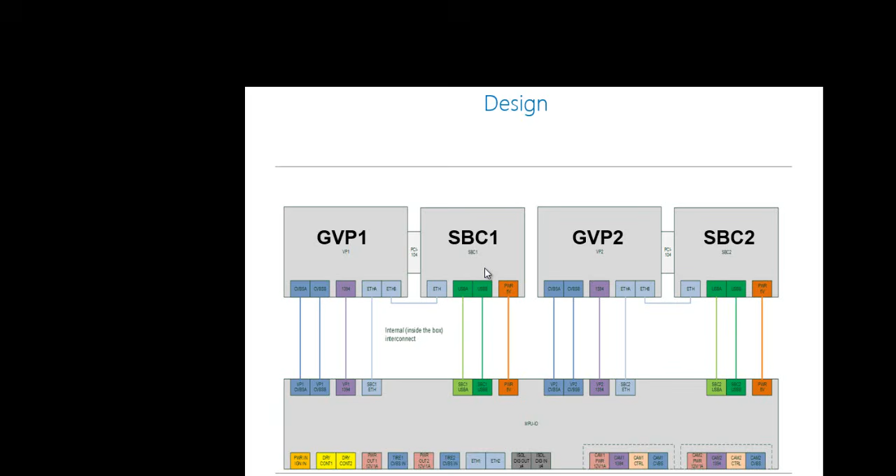When it comes to video processing, we have another component we call GVP, which stands for the Genetec Video Processor. We need 1 GVP per processing unit, so SBC1 will communicate with GVP1, while SBC2 will communicate with its own GVP. To ensure communication, GVPs have their own IP address as well. In this case, GVP1 will get 10.3, while GVP2 will get 10.4. So right there, we're using 4 IP addresses.

Now, of course, what would be a Sharpx with no camera connected to it? If we go for a Sharp X4M, we might be able to connect up to 4 cameras. In this case, we will connect 2 cameras to the first processing unit and video processor, and those 2 cameras will require IP addresses. Then 2 more cameras, camera number 3 and camera number 4, to the other processing unit, which makes it for 8 IP addresses if we allocate 1 IP address per camera.

Now this is a lot of IP addresses, and we want to make this product easy to use and convenient. So we don't expect you, if you wish to change the IP address of a Sharpx, to go on every part of your device and change the address. This would be very time consuming, and this is obviously not the case. So we have the MPU, the mobile processing unit, and the MPU will, among other things, manage IP addressing in your Sharpx.

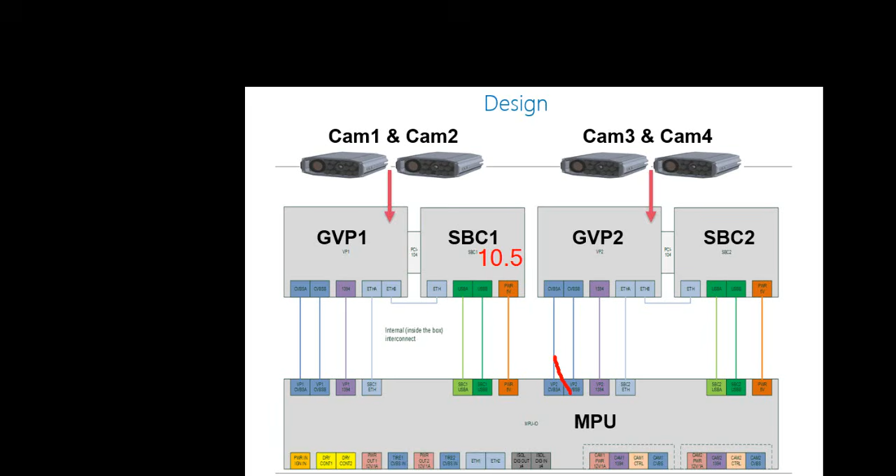So what you do is the following: should you change the IP address of your camera to meet your network scheme, let's say here we're going to go for maybe 10.5, 192.168.10.5. What will happen is the MPU will pick up the new static IP address set for the first processing unit, and will automatically reallocate new IP addresses to the other devices.

Following this very specific order, the MPU will automatically give 10.6 to SBC2, 10.7 to GVP1, 10.8 to GVP2, and so on. So as far as you're concerned, the only thing you need to take care of is change the IP address of your SBC1, and the Sharpx will take care of everything else.

Now this is fairly straightforward. Now the problem we see is you might allocate 10.5 and maybe use your wireless router or any other device you run in your mobile to use maybe 10.7 and 10.8. This is where we have a problem, because you will end up having an IP conflict, and this could lead to some complication during the install. So remember to allocate the IP address of SBC1, and remember that the next 7 IP addresses will be used by the other components of the camera.

Also, the other thing I wanted to say here about this slide is you only need to take care of your SBC1, so don't try to change the IP address on your SBC2. The IP address of your SBC2 will directly result from the IP address you have set for your SBC1.

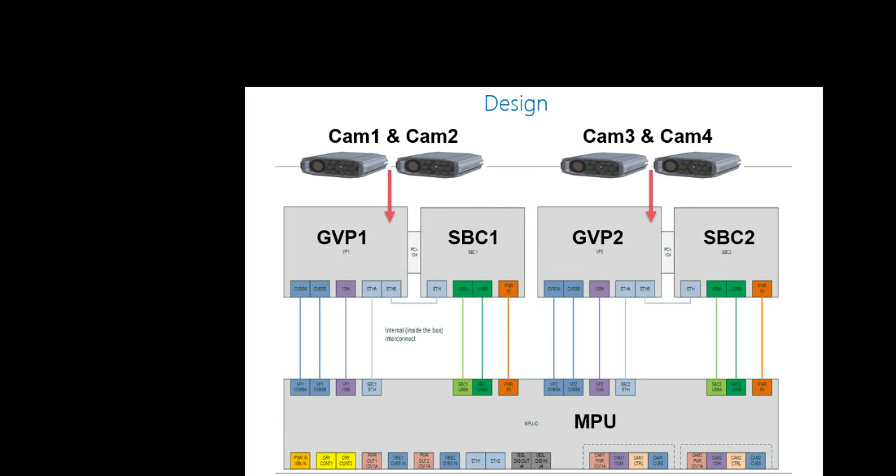Moving on from hardware to software, we often have a lot of questions about how it works inside the box. We wanted to take this opportunity, this webinar, to discuss further what are the software internal components of a Sharp equipment. Being a Sharp 2, being a Sharp EX, or being a Sharpx, the components are the same. We have the Genetec Sharp HAL, which stands for hardware abstraction layer. We have the Genetec Sharp Logger, the plate reader, the Genetec Sharp Portal, and the updater service.

Now, how do those components work? How do they interact? And what do they do? Let's take a minute here and talk about it. The Sharp HAL is pretty much in charge of taking care of your hardware. By hardware, we mean the illumination board, the LPR camera, and the exposure control. So the HAL will be the bridge, or the interface if you will, between the other services and the actual hardware of your camera.

The HAL will talk to the Sharp plate reader, which is really the core of our software. The plate reader is the role that will process the incoming images and find license plates and extract metadata. So this is where the magic happens. This is exactly where we will be able to find plates and populate the information.

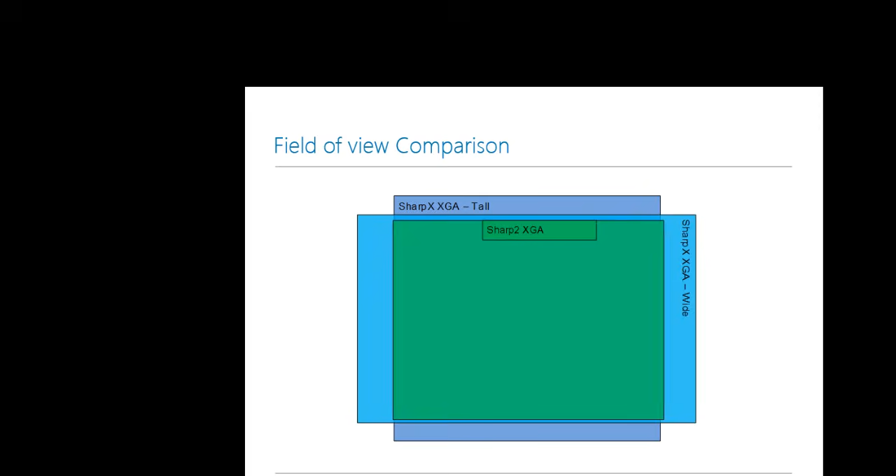Here, for instance, if you get a SharpX XGA in tall, you will get something like this. Now, if you get the wide version, mostly used for mobile, you'll see that the ratio, the format, is not exactly the same. Now, if we talk about Sharp 2 XGA, you'll see that it's slightly smaller. And eventually, of course, if you get a Sharp 2 VGA, the large decrease in pixels will make the field of view a lot smaller. I wanted to stack those here to give you a better picture of the difference between the versions. So now you know what's the difference between tall and wide.

Of course, if you've attended any of the AMC training, you should know by now the lens matters. We offer different lenses which will give you very different results. For instance, let me take an example here. If you attempt to read, let's say, a license plate about 16 feet away from your device, depending on the lens you pick, the result will be very, very different.

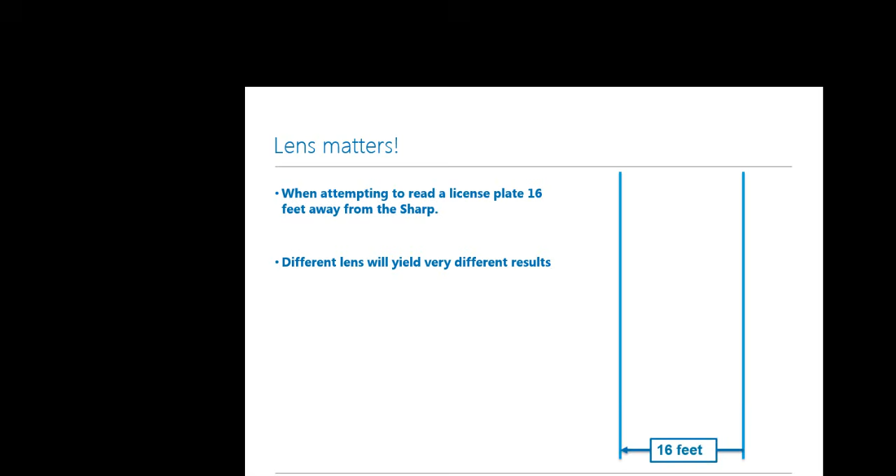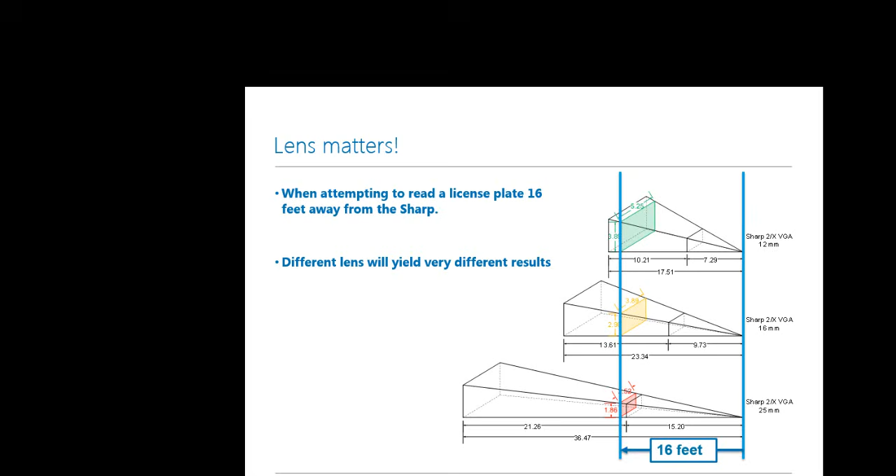Now, if you looked at the AutoVu handbook, we have some information about the different fields of view available. Our product specialist here in AutoVu has been doing a lot of work giving us more information about this. The information I'm about to show you, and much more, will actually be published in a document and available to all of our integrators.

Here I wanted to show you a sample of the work he did, which will give us a much better picture on the practical reading zone for any camera. Let's talk about a 16mm camera, and let's talk about the difference between VGA and XGA.

If we look at the VGA camera, we see a maximum reading distance of 23.34 feet, all in feet. The beginning of your reading zone starts at 9.73 feet. Now you see this chart is color-coded, which is very important for us. The best part is going to be green. Yellow is readable, but not optimum, and red means your license plate won't be picked up.

So according to this document, your reading zone would pretty much end here and start at pretty much 10 feet, giving you something like nearly 14 feet of reading zone. And this is in VGA.

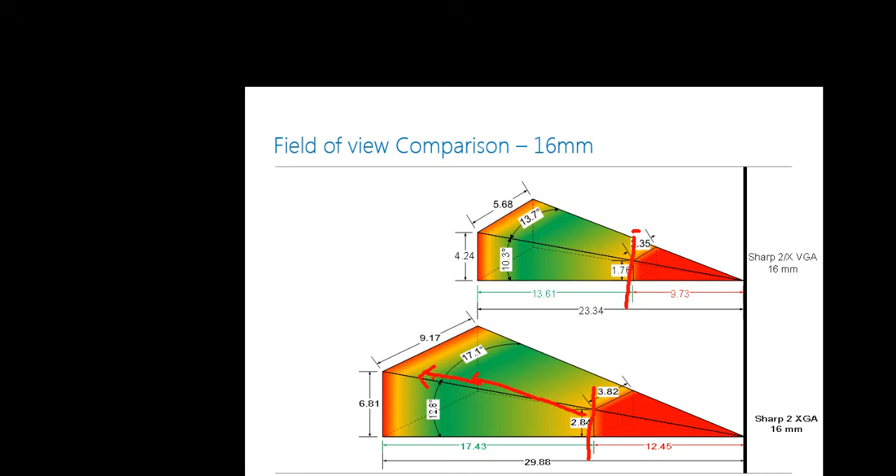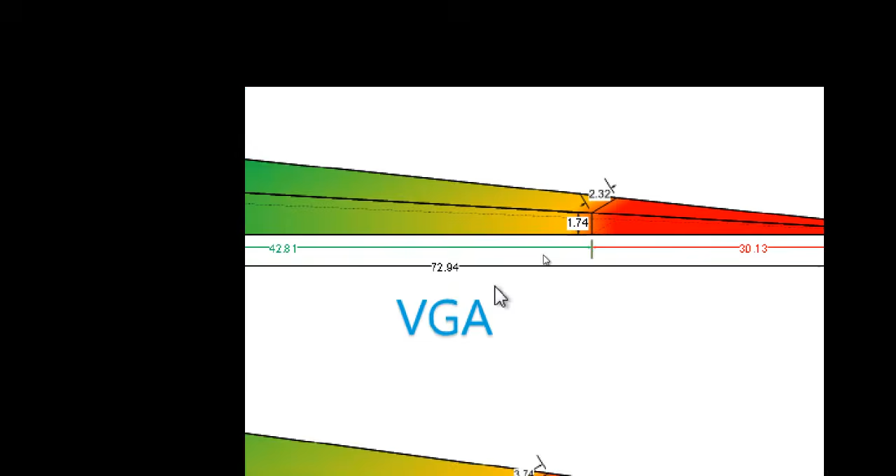I'd like to do the same exercise here with a 50mm lens. Now this has been slightly rescaled to fit in the PowerPoint, so keep this in mind, but the numbers are very accurate. And here we pretty much see the same thing. I'm going to zoom in on the VGA. We see that VGA starts at nearly 30 feet for a maximum distance of 73 feet.

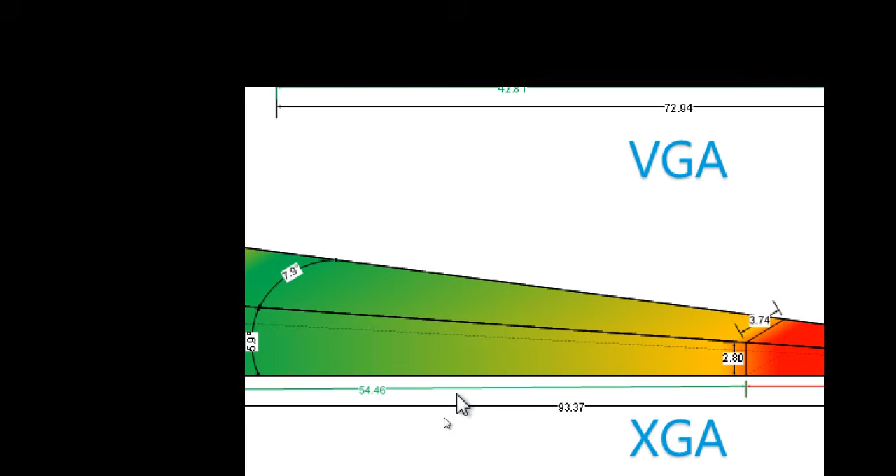While if we go down to the XGA, it only starts at 39 feet, which is nearly 10 more feet, and will end at 93 feet. This is 20 more feet than the VGA version. So in a 50mm scenario, we see that XGA gives us a large advantage in distance. So of course something to take into account when making the decision between VGA and XGA.

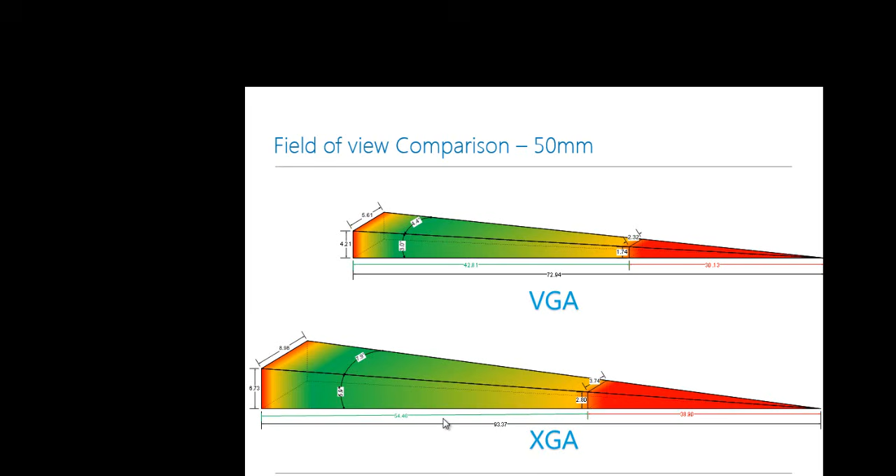Now we're going to stay with VGA, and I wanted to show you this one as well, which is going to give us information on the different lens used, again all in VGA. Now we see that the difference is quite significant. For a 12mm lens, for instance, the maximum is going to be nearly 18 feet. I'm going to zoom in here. Hopefully you can read the number. So we're looking at 18 feet.

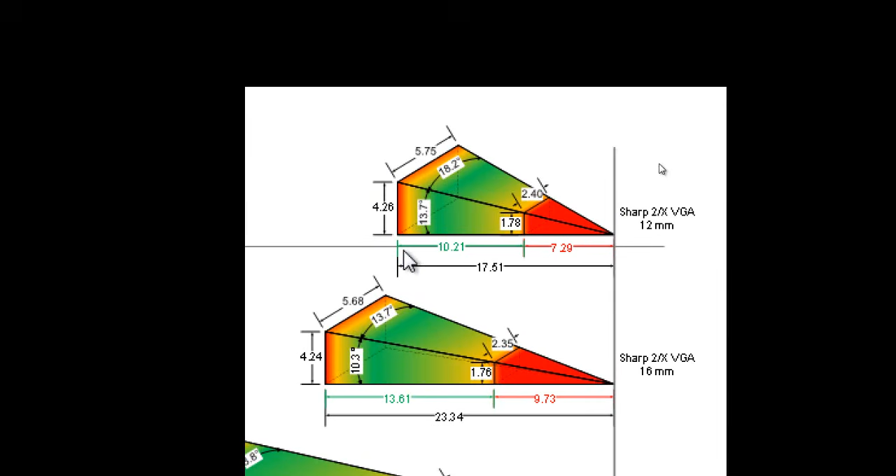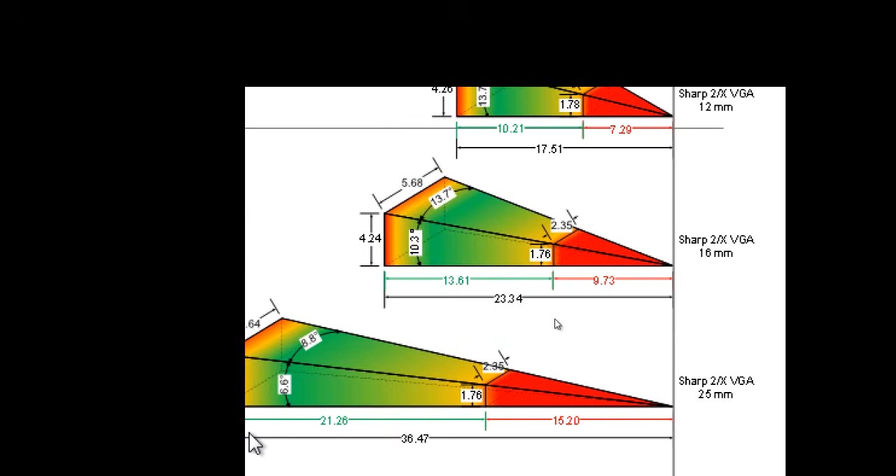16mm will give us pretty much 5 to 6 more feet. 25mm will go up to 37 feet. 35mm will go to nearly 51 feet. And of course, the 50mm lens will go to 73 feet, which is what we've seen on the previous slide.

If we do the same exercise here, this time with XGA, and look at all the different lenses we offer, the distance will obviously be slightly longer. Let me zoom in here one more time. Here we went from 18 feet, if I recall, to nearly 22.5 feet.

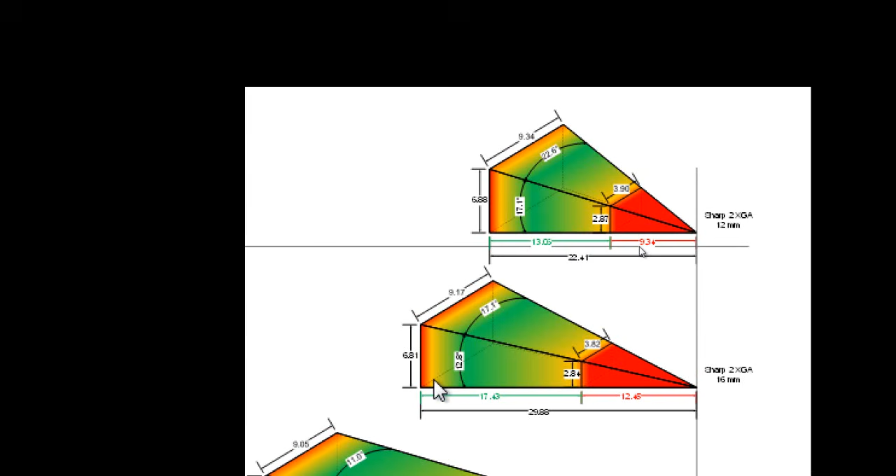16mm will give us up to 30 feet as maximum distance, and an 18 feet reading distance. By the way, when I say reading distance, I refer to the distance between your maximum reading distance and your minimum reading distance.

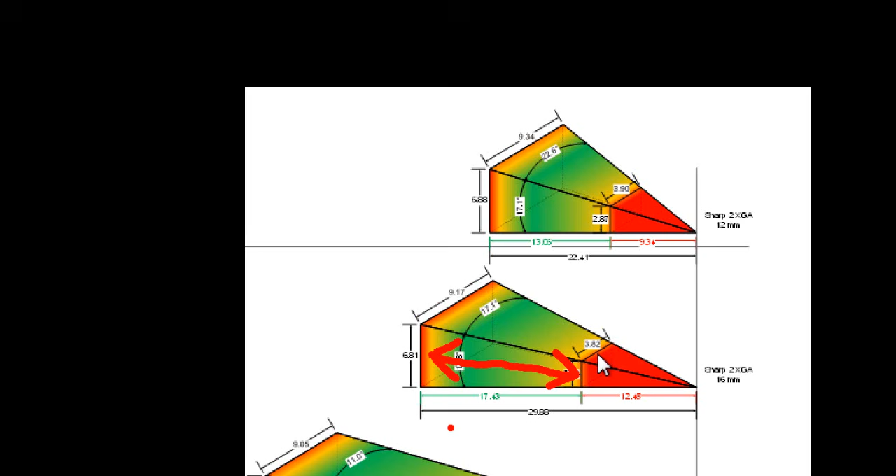In 25mm, we get 28 feet, which is 10 more feet than the 16mm lens. And 35mm here gives us quite a long range, and of course the longest range will always be obtained by a 50mm lens, with a total reading zone of nearly 55 feet.

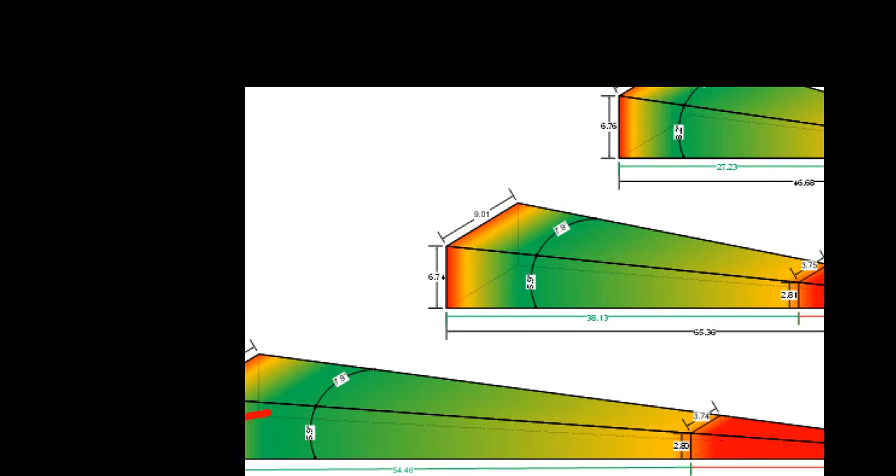Now more than ever, we see it's color-coded and you see the absolute optimum reading zone. It's pretty much here. Now, your system will read, but if you want to stay in your optimum reading zone, this is the one I've highlighted in red.

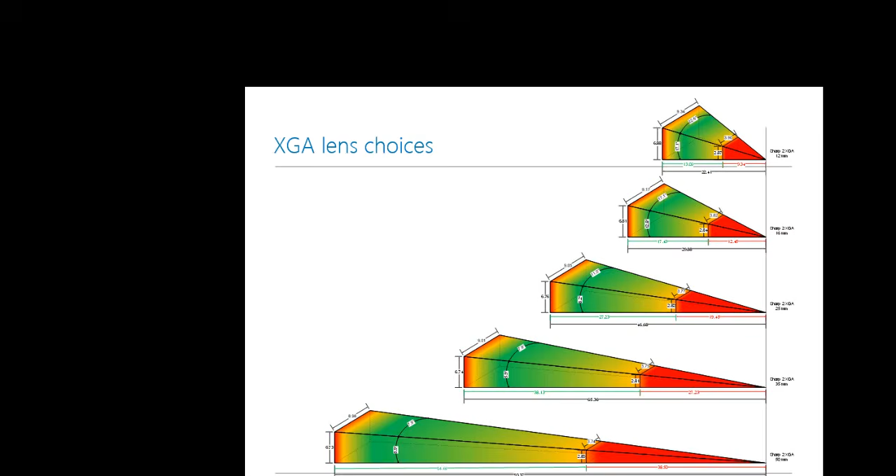Now, let's talk about a few facts here. Reading accuracy is directly dependent on camera positioning. We talk a lot about this in training, but again, I have to insist, it's all about camera positioning. The resulting field of view may vary depending on the hardware, and here I'm talking about the different resolutions available. Lens and LPR camera resolution will also have an impact on the field of view.

As part of the document we're about to produce, including the field of view I've previously shown you, we're going to produce a bunch of tables, such as this one, which is for the Sharp 2 XGA, which has a resolution of 1024 by 768. Depending on the lens being used, we're going to give you the maximum width, the maximum height for your field of view, the minimum reading distance, and the maximum reading distance. You will also have the depth of field, and all of this is in feet.

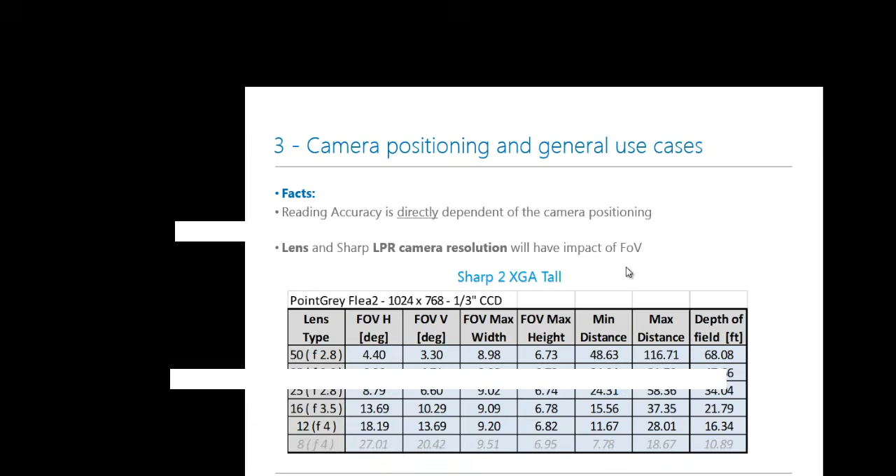There's a tool we talk a lot about, again in training, and I hope you know this tool and you've used it. This tool is the Sharp Field of View Calculator, and it's available to any of you. We strongly advise you to use it to simulate before you actually deploy. This tool will help you find the best position and try different lenses without actually having the hardware. Now there's something very interesting about this tool.

When we use it, we set it in a specific way. Let me zoom in, hopefully it's going to work. If you're not very familiar with this tool, this yellow dot here refers to your camera. This is a top view of your scene, your site. And here we see two dotted lines: one at 7.25 feet, another one placed at 17.5 feet.

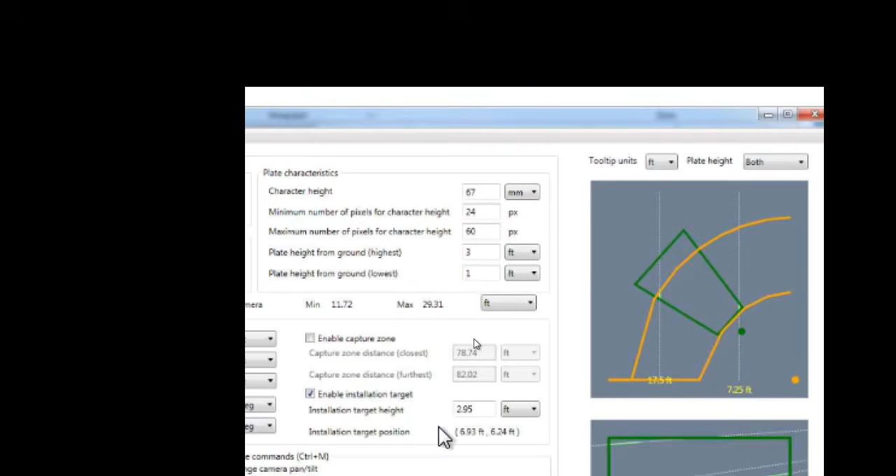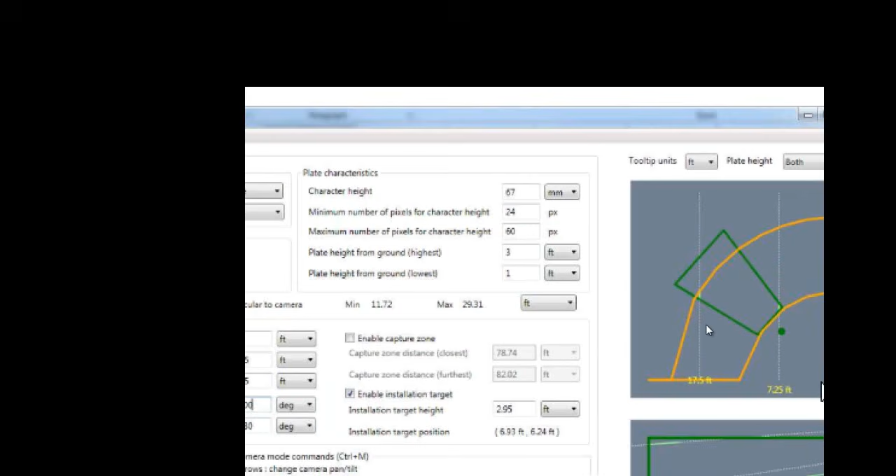Now those two lines refer to the two following arguments here. Maybe it's difficult for you guys to read, so I'm going to tell you. It says lane horizontal distance closest, and the second one says lane horizontal distance furthest. Now, before we argue about the name being used here, they actually refer, as we would expect, to the center of the closest lane from the camera.

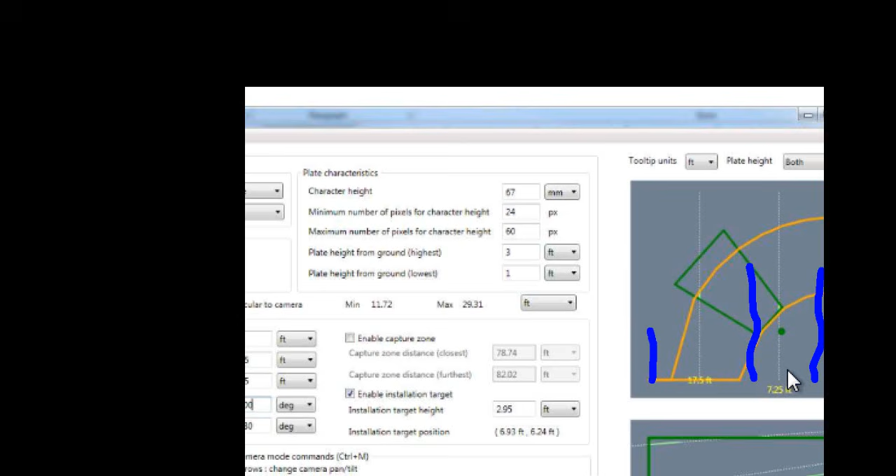So here I'm going to attempt to illustrate. If this is the edge of your first lane, this would be the center of the lane. Now we care about the center of the lane because this is where we expect the license plate to be, should the driver not be drunk. This would be the separation between the two lanes, and this would be the second lane, and again this would be the center of your second lane. Let me say this one more time: what you see here, this dotted line, is what we call lane horizontal distance closest.

Now, this is one way of using the simulator, but there's actually another way, a very different way, which is much more interesting, especially if you wish to simulate a single lane scenario. Instead of using those two lines as the center of your closest lane and the center of your furthest lane, you could use those two lines to set up the edge of a single lane. In this case, what you see here as two dotted lines would not be the center of the lane anymore—it would be the edge of your single lane.

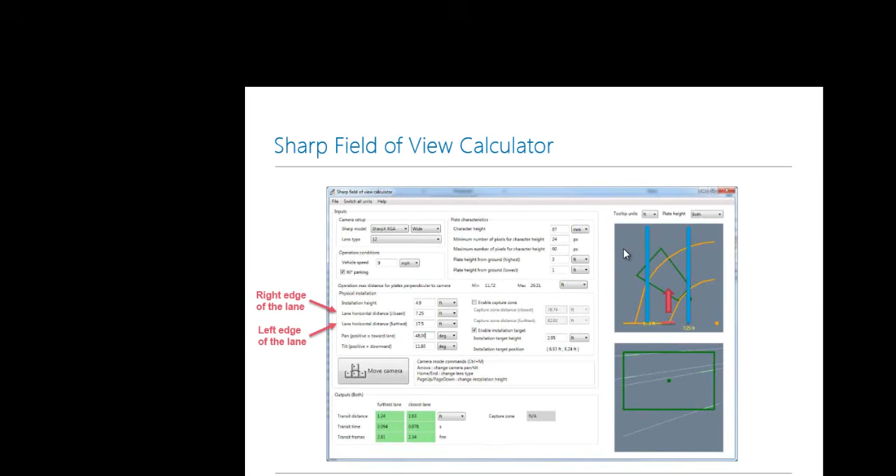There you go, perfect. Now those two blue lines you see here would actually become the two edges, and your vehicle would cross between the two lines. So this would become the right edge of your lane, while the other setting, the furthest setting, would become the left edge of the lane. If this is not clear enough, your vehicle would actually be in between, and it would transit through the lane this way. Now that's a very interesting approach, because it's going to give you very interesting data when you simulate about your different types of license plates.

Let me stay on this slide for one more minute. What you see here in green is the projected field of view of your camera on the ground—well, almost on the ground. This means your license plate will actually transit through the center, again if we expect the person to drive straight.

Now, if the person is not driving very straight, we know that the license plate will always be within those two lines. You're probably wondering, if you simulate this way for a single lane application, this data won't seem so relevant anymore. Well, actually it's very interesting, because this data, giving us the transit distance for the two edges of your lane, will give you the two worst case scenarios—the case where the license plate is on the edge of the lane you're trying to simulate. And if you simulate the two worst case scenarios, and if they match, then you can be pretty much sure that any license plate within those two lines will be perfectly read.

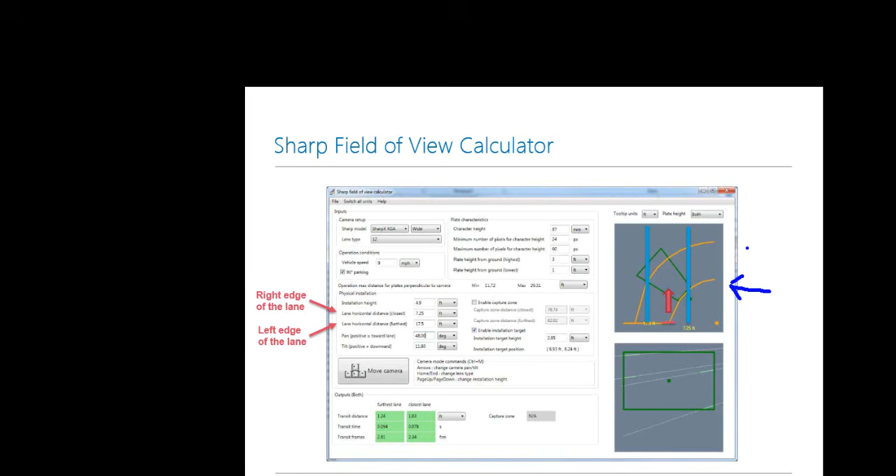Now again, this is the top view here. And the general feedback we got from you guys is that this view is not very clear. Now this view here is what the camera sees. It might be good for us to give you this information, but some people are not sure how to understand it. Why is there 4 lines? Why is part of the line solid green while the other part is dotted white?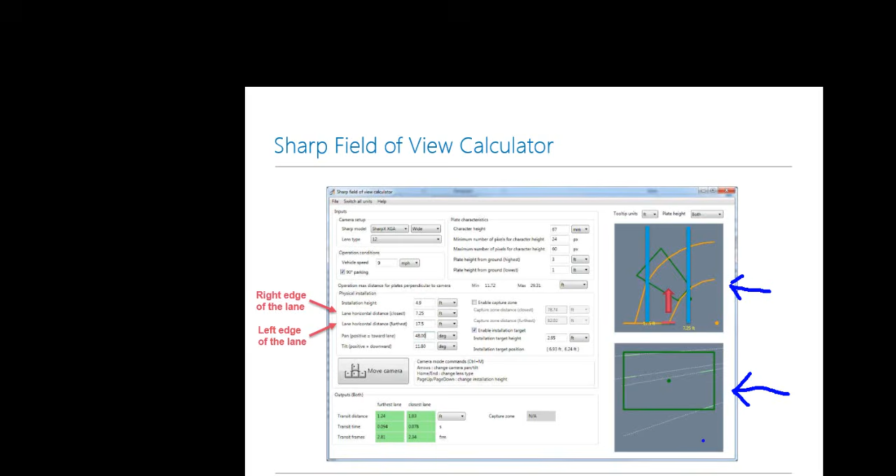Well, this, as a reminder, refers to 2 pieces of information. First, we set up 2 lines, so we're going to have a simulation for the transit distance of plates on the first lane and the second lane. Then why is there 2 times 2 lines? Because we always simulate worst case scenario. We always look at the license plate in a very high position, the one we define as the highest expected license plate. And of course, we always look at those people with a sports car like Lamborghini, where the license plate is at a very low position.

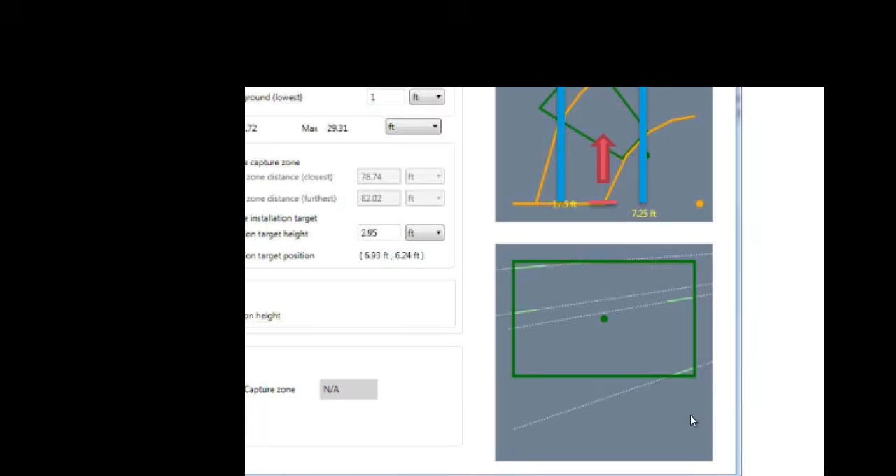So again, here, if I attempt to illustrate this, here would be our sports car, and the other line here would be our vehicle with a very high plate. And those 2 other lines would be the sports car on the other edge, and here it would be the utility or pickup, whatever you have in mind.

Now, staying in this new configuration where those 2 lines refer to the edge, I'm going to attempt to give you a 3D perspective of this simulation. What you see here in blue, this cube, is your reading zone. Every license plate that transits through this cube will be read.

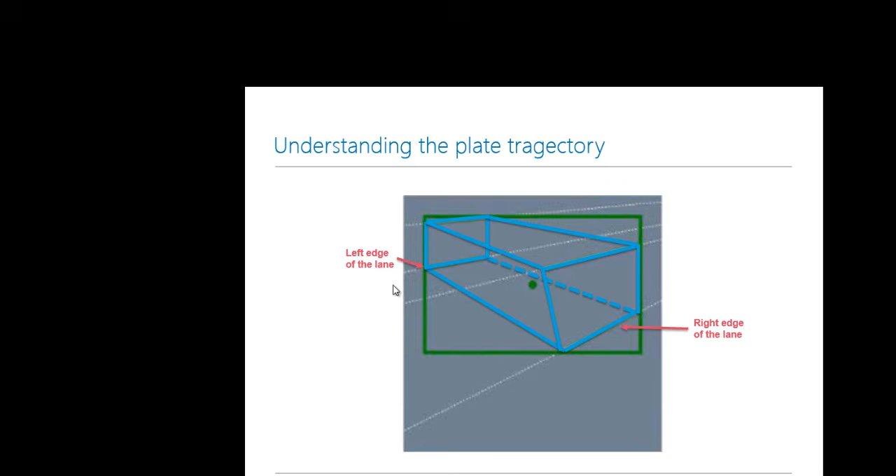This here is the right edge of the lane, while this is going to be the left edge of the lane. Of course, here we have 2 lines because we always look at the lowest plate and the highest plate. So the highest plate on the edge of the lane would pass through here, while the lowest expected license plate from the right edge of the lane would pass through this line. So any normal driver would actually be pretty much in the center of this shape. Here, if we take a license plate that would normally transit, it would do something like this.

Using the field of view simulator to simulate a single lane with these settings gives you a much better perspective and will help you exactly narrow down where your reading block is. This is pretty much what we could call our reading block, where every license plate that transits through it will be read. Again, I'll show you this one more time: your license plate will go inside. Of course, I did not take the entire vehicle to make it easier to read.

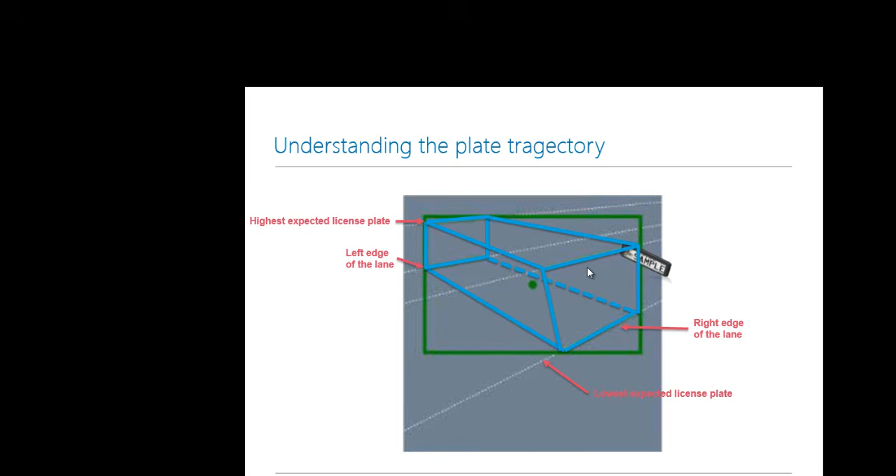Unfortunately, I can't hear you, and I don't know, guys, if this makes sense to you. I hope it does. Yeah, this is it.

Now with this in mind, let's look at some mobile scenarios. The field of view tool allows you to simulate both fixed and mobile scenarios. For mobile, it's a bit more challenging because you need to simulate and use as a reference point the position of your camera, which is likely to be on the roof of your car. This will be challenging because you have to recalculate the different numbers. Let me illustrate this.

When you use the field of view tool to simulate a mobile scenario, you can only do one camera at a time. And of course, you need to be able to gather lots of information about your environment, like for instance, distance to the edge of the road, the patroller, the parking space and size you expect, and information like this.

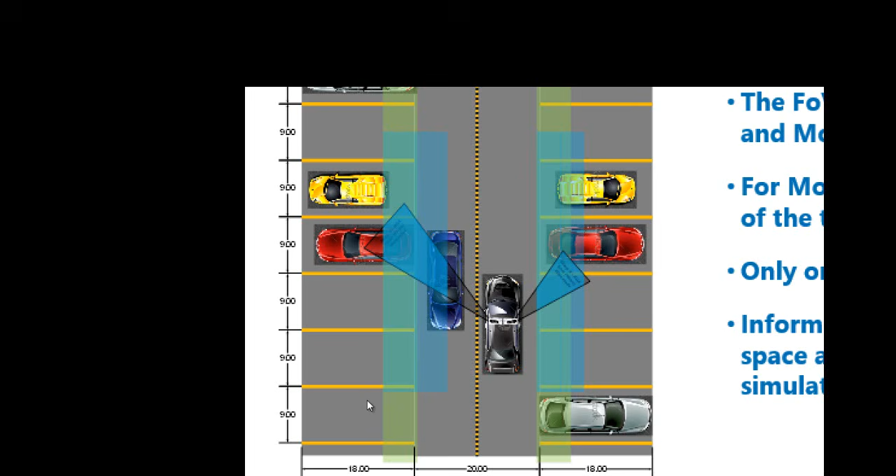Here's a very simple example where we attempt to read a vehicle being parked at 90 degrees on the right side of the patroller and on the left side. Now, of course, when people park, they don't always park the same way, so it's very difficult to estimate where the license plate will be. What we highlight here in blue is what we will use in the field of view simulator as the size of our lane, because people may park at the very edge of their parking spot, or have a very small car and park all the way down. The license plate will not be tightly defined, so we take a margin of error and simulate this as a small lane.

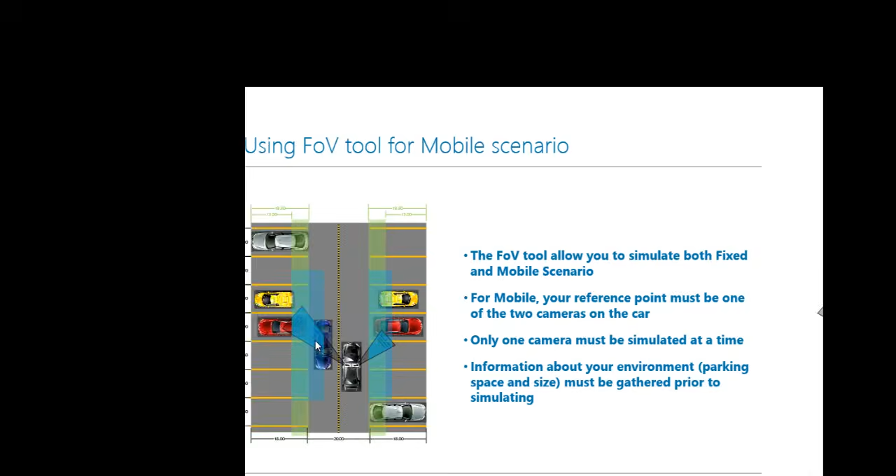Removing the background, I'll just keep the vehicle and the different field of view setup. In a document we're about to release, we'll show you multiple case scenarios, and for all of those use cases we'll provide you the exact type of equipment you need, the lens you should pick, and the exact angle you should use based on what you intend to do.

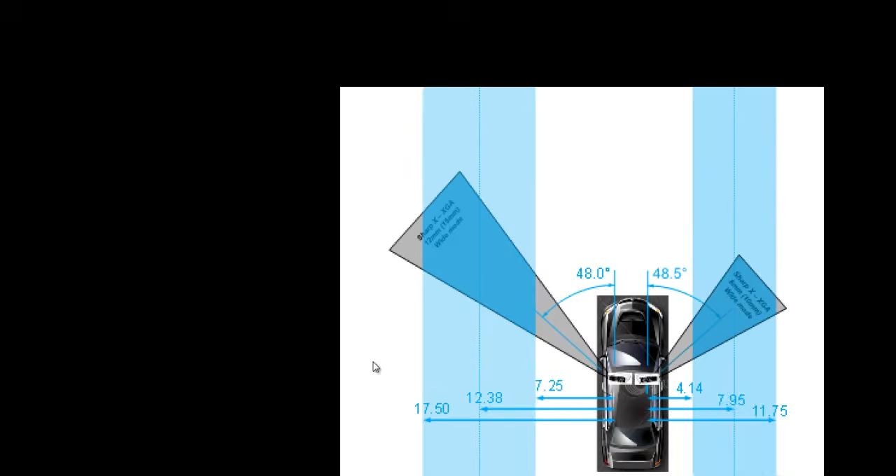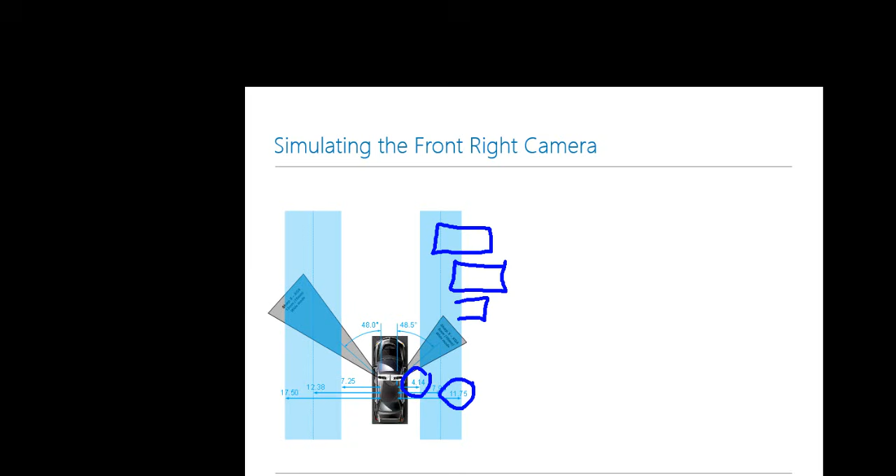Here, for instance, we estimate that the license plate of a vehicle being parked may range from 4.14 feet at the closest, up to 11.75 feet. Any license plate in this zone will probably be read. Those are 90-degree parked vehicles.

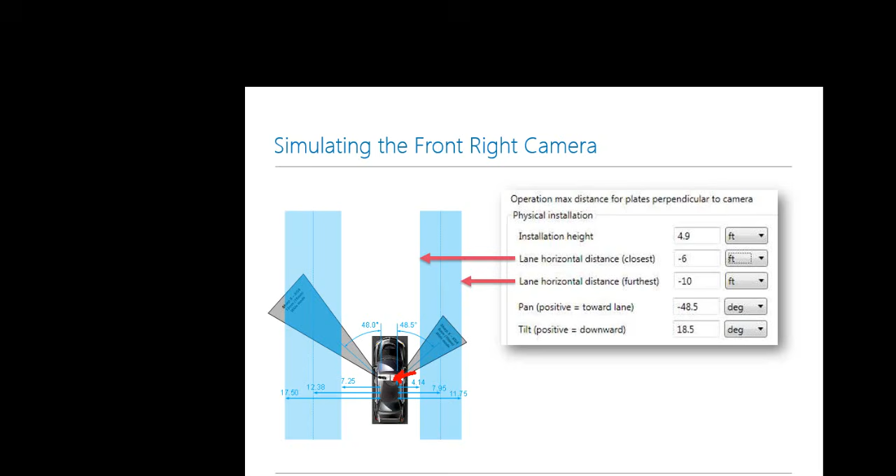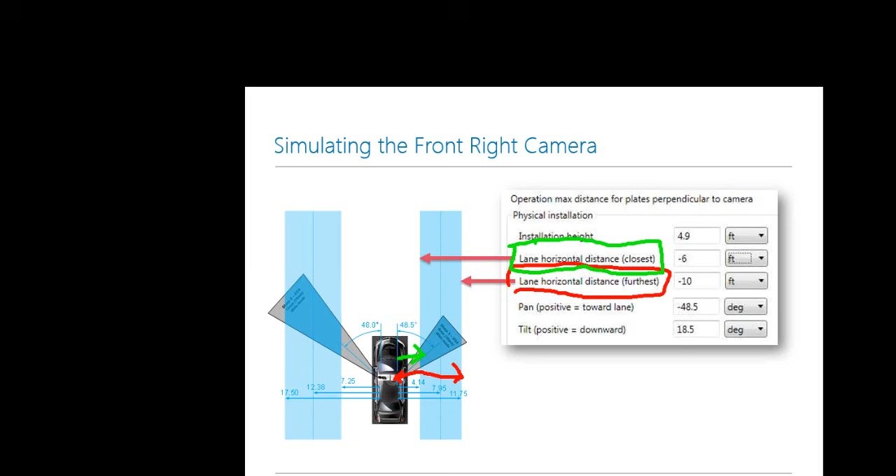When you set up your field of view simulator, the distance you should use to border the two edges of the lane should be the distance from the camera itself to the edge of your expected reading zone. So the distance from this camera to this point would be the lane horizontal distance furthest, let me highlight it for you. While the distance from the camera to the beginning of the reading zone would be the lane horizontal distance closest.

Your reading zone will be defined in between, in this case, 10 feet and 6 feet.

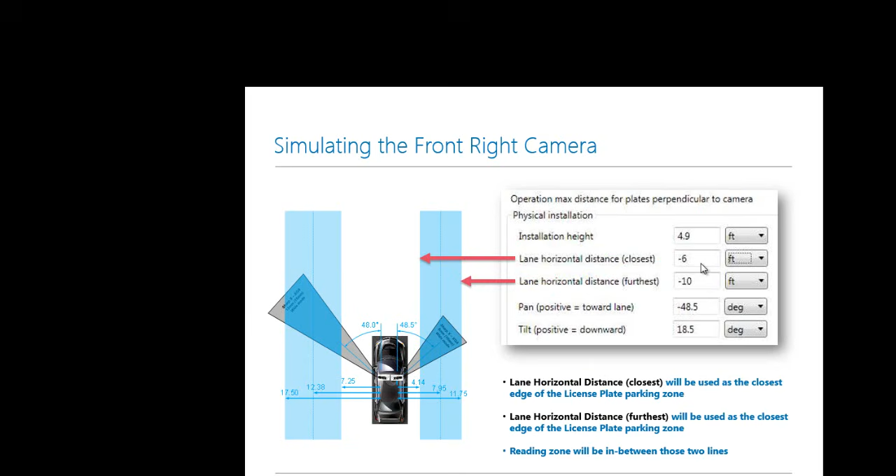Okay, enough with theory and concept, now let's bring a few cases. Our product specialist actually did something like 10 different cases, which cover a wide variety of scenarios, very interesting and obviously a lot of work. Here in this webinar, to keep you engaged, I'm going to stick to 3 different cases. I don't expect you guys to take notes of the numbers, this document will be published, but I just want to give you a general understanding and an idea on how we will show you the information and how you should read it.

So here we're back to the case I was covering earlier. If you look inside the field of view, as discussed, this is going to be the 2 edges. Now, this picture has been resized, but the dot here you see is the actual camera, which should, to be exactly accurate, be placed here.

In this case, 90-degree parking, typical installation, the simulation would look like this.

I don't want to zoom in and look deeper into the numbers as they will be published, but I want to remind you of something: using the field of view simulator, you can save your work by simply clicking File, Save, and your simulation will be saved as an SFV file. Here at Genetec, we love those files, so if you do a simulation and want it validated or approved by Genetec, feel free to save it and email us the file, and we'll be more than happy to look into it. We're also looking into providing this information in the form of SFV files, so you can simulate directly and maybe change a few things to see the different impact.

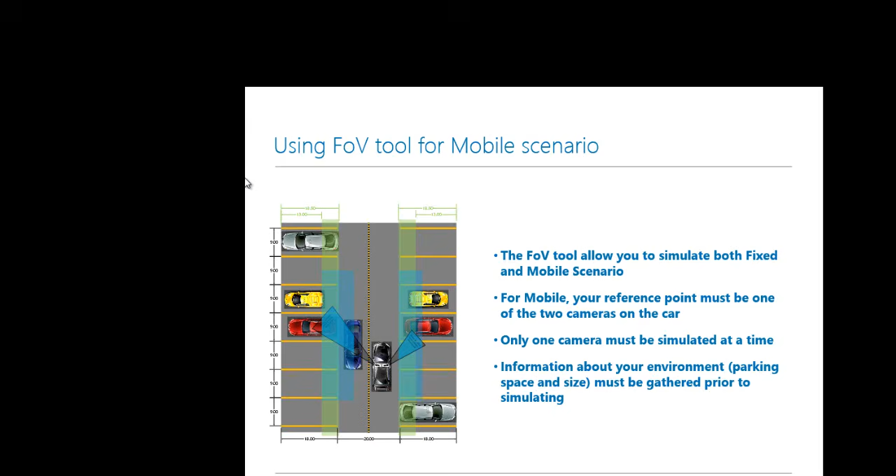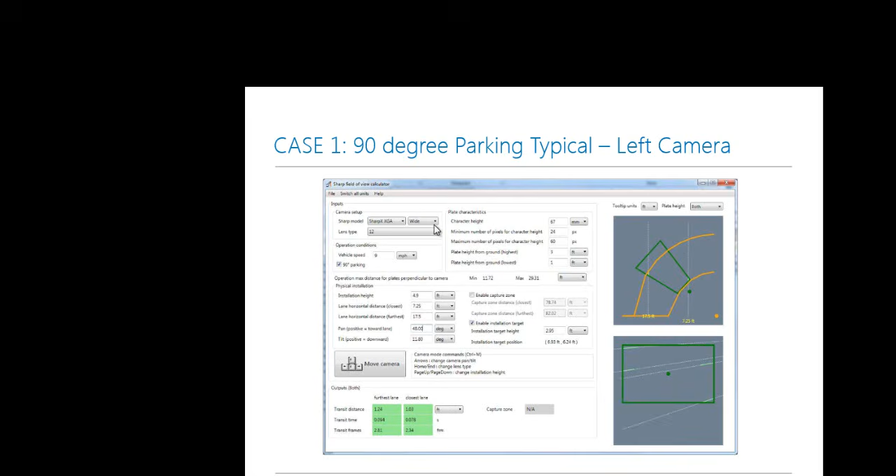Here in this case, allow me to go back a couple of slides, I want to show you this one. The reading distance from the right side and the left side is very different because the driver here is driving on the right side of the road. The parked vehicle on the right will be very close, while the vehicle being parked on the left will be slightly further. On top of it, it would be a plus to capture the license plate of incoming vehicles. For this reason, it's more interesting to select a different lens for the left, and of course a different configuration for the right. So the camera we picked for the right is an 8mm lens, and from the left we're going to go for a 12mm, and you see the different angles picked are very different, and of course we go wide in this mobile scenario.

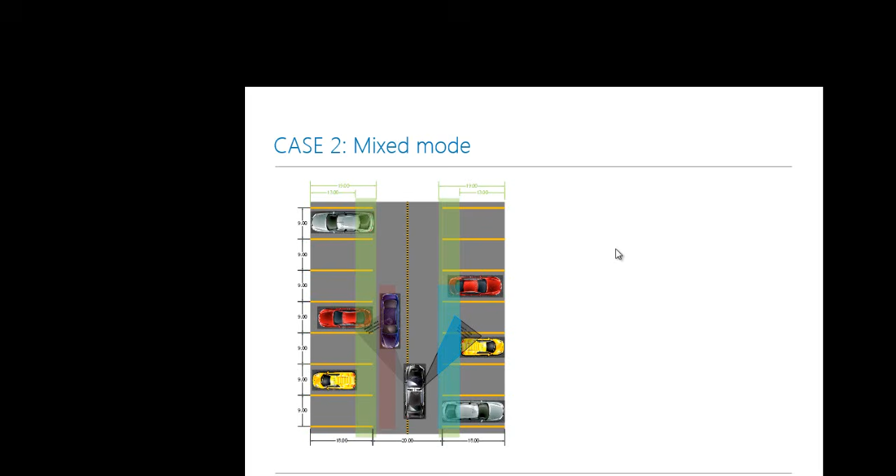Another case we've been working on here is what we call mixed mode. Mixed mode is really about capturing parked vehicles and oncoming traffic, hence the name mixed. If this is something that interests you or your customer, we came up with different numbers. As you see in this setup, we will be able to read a parked vehicle, one driving on the right lane, and one in a situation with oncoming traffic.

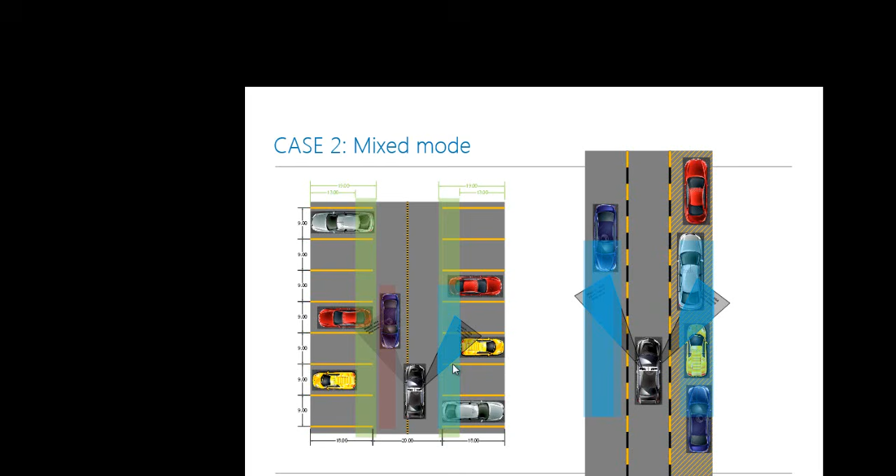If you care for the detail, there is a slight difference between this illustration and the one I showed you a couple slides ago. If you remember, the vehicle was properly positioned on the right lane. Here, to get optimum results, you see that this person is actually slightly driving on the line. We will give you that information, and I'll continue to say it: camera positioning matters, but driving style matters a lot too.

This is also why we produce these documents, to show you not only how you should position your camera, but also how you should adapt your driving style for optimum results.

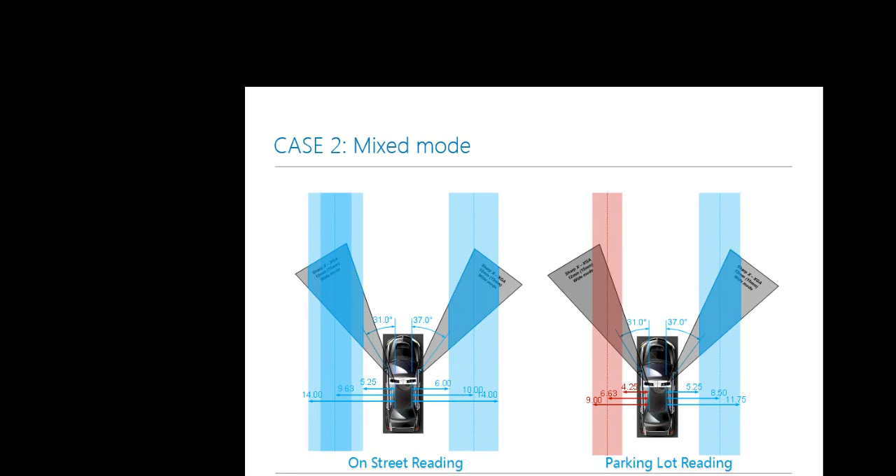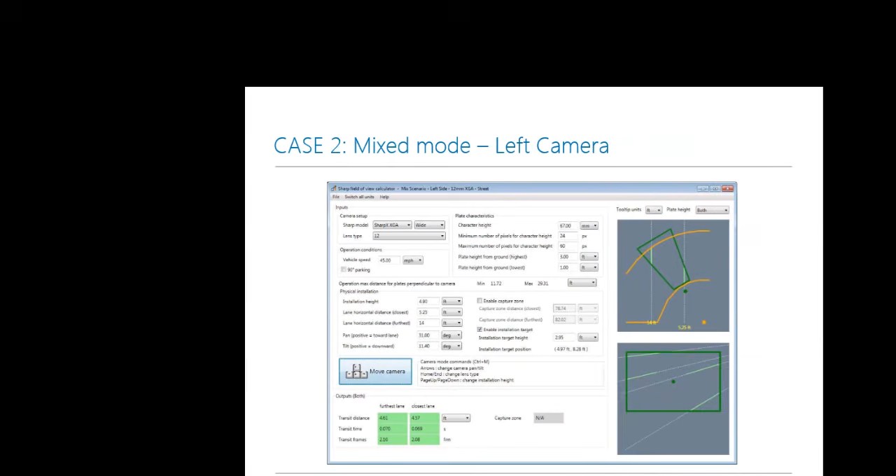Here in mixed mode, we are looking at the following configuration: on the right, 12 millimeter, and on the left, we'll also be using 12 millimeter. Here we have the simulation for the right camera, and this is going to be where your vehicle will be. In mixed mode, for the left, we'll be looking at slightly different angles.

Now I'd like to talk about another case, case number 3. This is a very interesting setup. Here we're not going to do a usual 2-camera installation; we're going to use 3 cameras in this case. Something we could easily do by using a Sharp X IP and having 2 VGA cameras in front position, right and left, and using an XGA camera located on the trunk of the car to get other lanes.

I really like this setup because it's very versatile. It's going to allow you, on road traffic, to capture your right and left lane, but using the other XGA camera, because of the increase of pixels compared to your VGA camera, you will be able to capture the 3rd and 4th lane from the vehicle, allowing you to potentially cover a 4-lane highway.

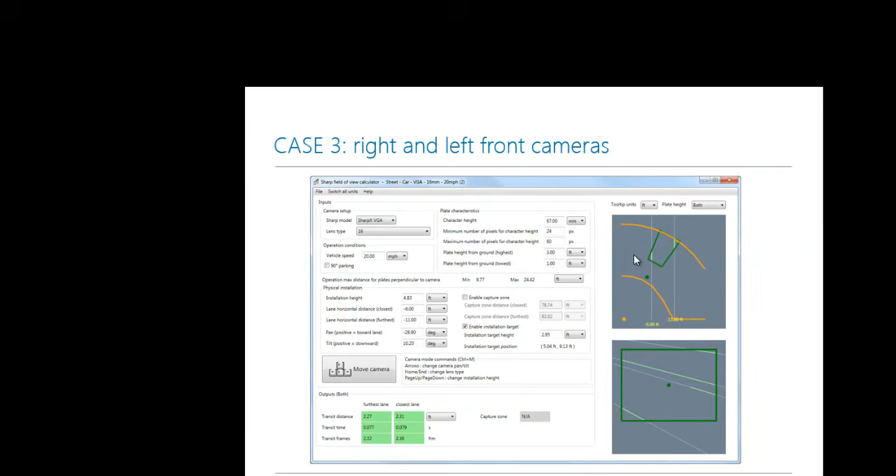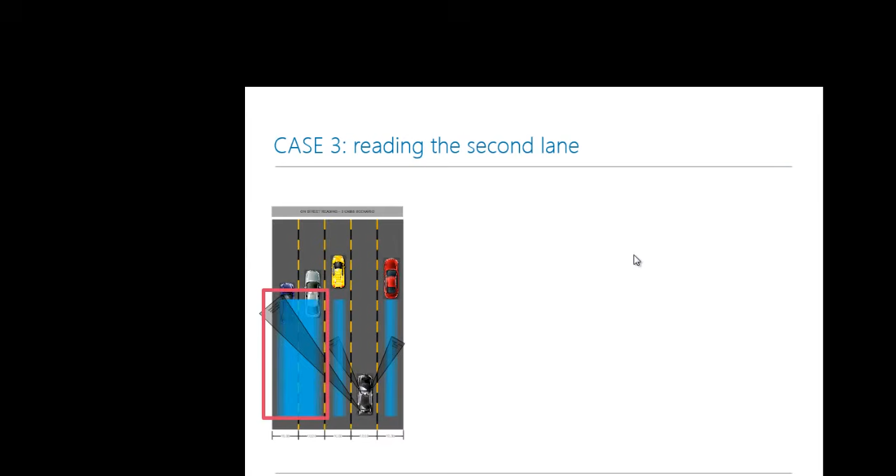Again, this setup only requires 1 Sharp processing unit. In this case it's slightly symmetrical, so the right and left front VGA cameras will actually use quite a similar setup, here a 16mm lens, while the other lane, highlighted in red, will use an XGA wide 25mm camera.

Because we like to spice up things here, if you look at the simulation we made using the AutoVu tool, this line here is going to be the edge of the first lane you intend to read, while this line here, highlighted in red, is going to be the edge, but not of the same lane, of the next lane, which is going to be pretty much here. Keep in mind the AutoVu tool is a simulator and you're free to use it any way you want to get the information you require. So this is also a very interesting use case for the field of view simulator.

Now I'd like to give you guys even more information about this. In this case, we came up with additional information. We know the speed could be a factor in how your system performs. We wanted to come up with numbers and let you guys communicate this information to have a better understanding of the product. The speed will have an influence on the range of operation of your system.

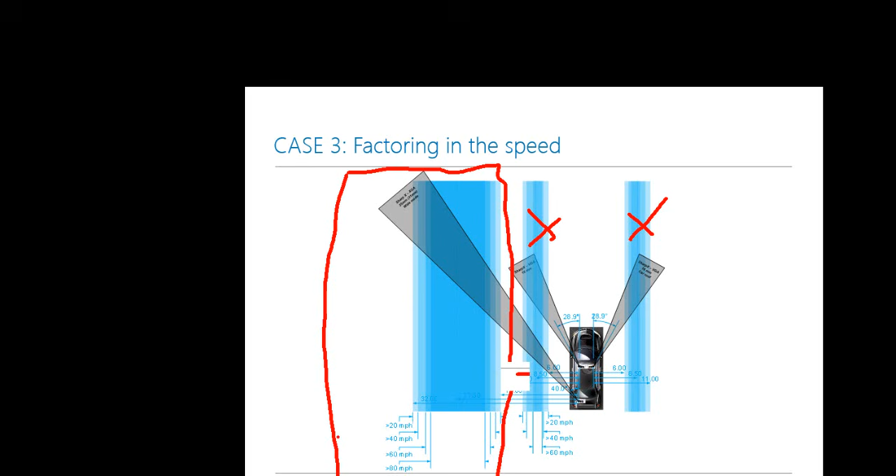Now, here, what we did is based on the speed of either your vehicle or the speed of ongoing traffic, we are showing you the difference it will have on your range of operation. Let's have a closer look here.

So your camera is here, and as you see here, the slower vehicle or yourself drive, the highest your range of operation will be. Here, if you drive at less than 20 miles per hour, you will have a

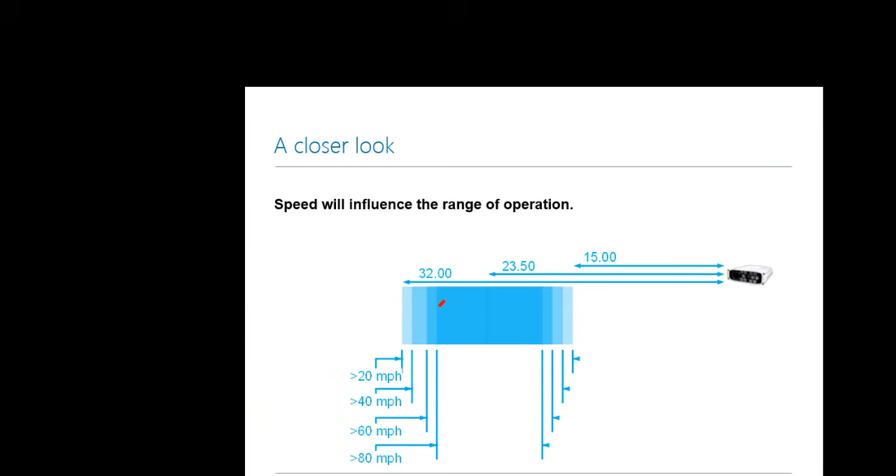range of operation ranging from 15 feet to up to 32 feet, center being at 23.5 feet. Now, if you're driving at, let's say, something a little more than 80 miles per hour, then your range of operation will be reduced by about 5 to 6 feet on each side, giving you here what you see in dark blue. Sorry about that. Here, this would be our new range of operation,

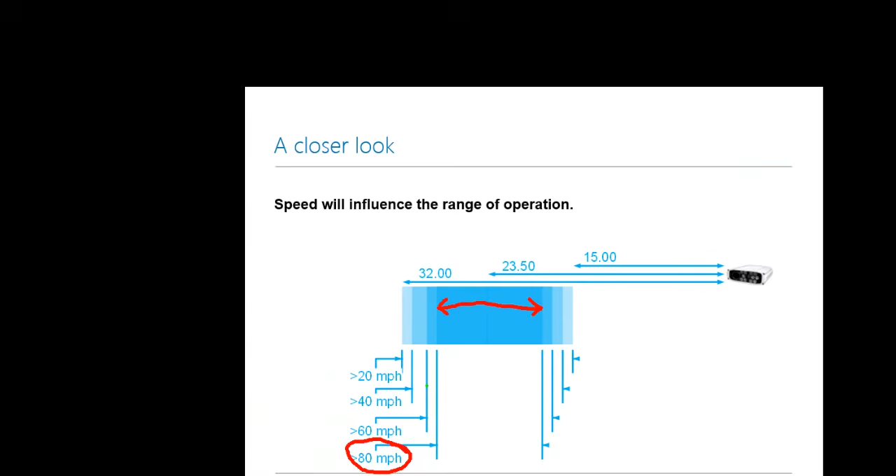driving at 80 miles per hour. Here, for instance, if we go with a little more than 40 miles per hour, then we gain a wider field of view.

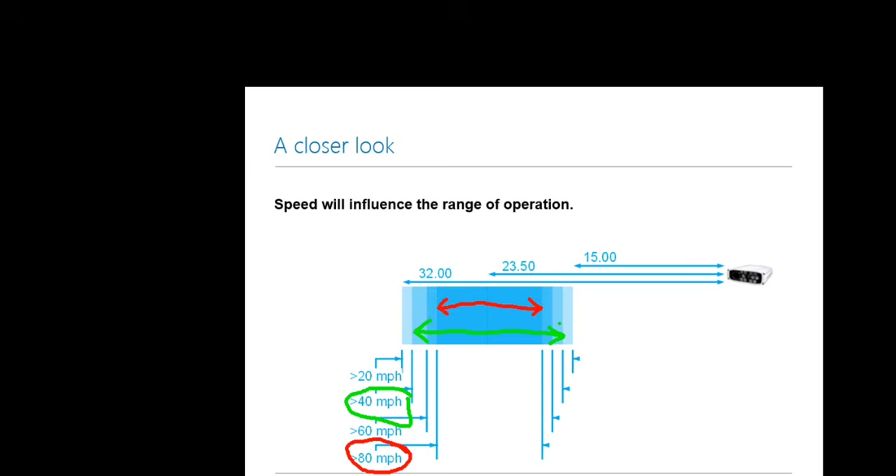So you probably knew this information already, especially if you did a few deployments, but we're very pleased to now put this information in numbers, and again, we will publish this information to our premium partner and other partners so they can have a better understanding and numbers. Again, here I decided to only cover 3 cases, which I handpicked. But our product specialist did a lot of cases, and again, we're actually working on making this document available. And again, while designing a solution, do not hesitate to involve us to validate your simulation.

Moving on to another part here of planification. The collect of license plate for context update. That's going to be interesting here.

As a friendly reminder, we use something called an LPR context. Now I like to refer to those as LPR profile. And what this really is, is a regional optimization of the LPR engine to improve the ability to read license plates for a given region. Now this LPR context or LPR profile contains lots and lots of information.

For instance, the type of grammar being used on the license plate. If there is a special code, like for instance, it must be 3 numbers and 3 letters, or maybe 1 number, 1 letter. The type of reflectivity of the license plate, possible known background, the font being used to help us do a better recognition. The dimension of the license plate, the layout, the structure, is it a one-line license plate, the spacing between characters, and much, much more.

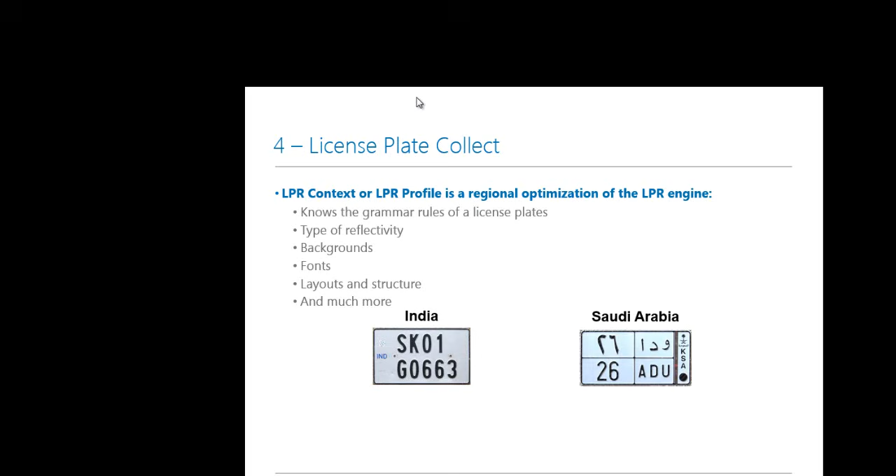So let's step away from the usual North American and European plates, and let's look at what they have in India. This here is a plate from Saudi Arabia, which we actually have a context for, and we read those plates very well. Those are 2-line plates with Arabic characters. And here I wanted to add Turkey, which is very European when it comes to the license plates, from Singapore, and of course I couldn't put no plate from the US.

Now, let's talk again about this process here. Not only might we have to create a new context for a new region where we don't have an existing context, but sometimes, something people in the US know very well, the background changes or the entire license plate structure changes because the state needs money. And they're like, hey, let's do a new fancy plate.

And of course this could be fine for us because the changes are minimum, and sometimes the changes could be quite drastic. Maybe they could change the reflective property, and we will need to do a context update. Now, context update will be integrating the new grammar rule, integrating new potential background, or integrating a new font being used with the new license plate.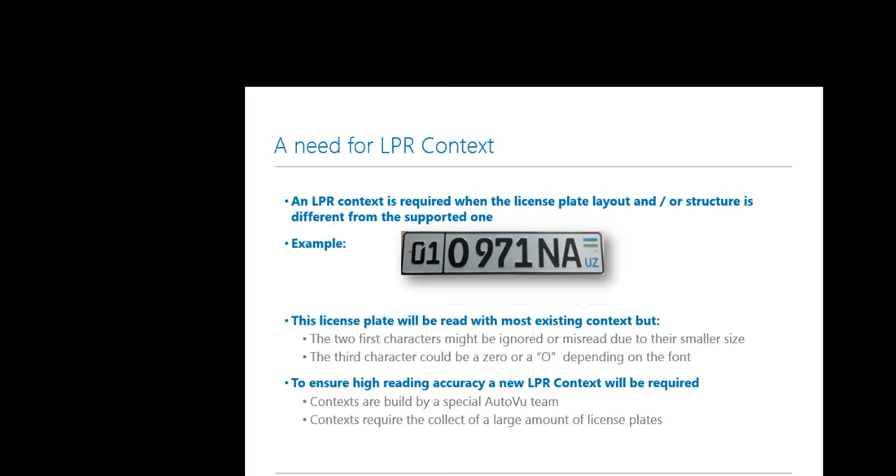So, we have a special team here in Genetec, and they are specialized in creating context, and they might need your help. Now, some people here probably know exactly what I'm talking about. When creating a context, we might need a local presence on site to collect plates. And maybe there's lots of misunderstanding or miscommunication about this, so I'm going to take this opportunity here, this webinar, to talk further about this and maybe cover how exactly we do it.

So if ever Genetec asks you to collect license plates, we don't expect you to go to the nearest shopping mall and steal license plates, okay? We can do better than this.

If we ask you for a collection of license plates, this is actually something you can now do from the Sharp portal. Previously, you had to use a special tool called the integrator tool. Now it's directly embedded from the web page, and anybody with the Sharp tool or SharpX will be able to do an image capture.

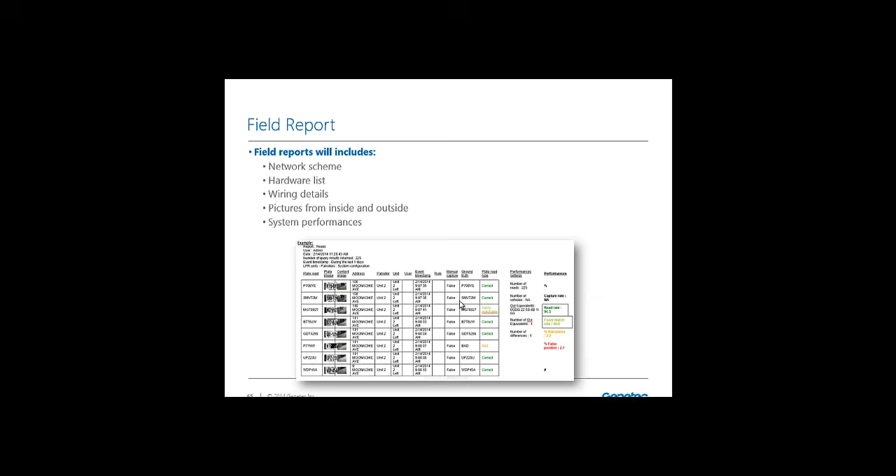So again, in the field report we will include network scheme, hardware list, wiring specifics. We love pictures from inside and outside the vehicle, and here's something very interesting: system performance. Yes, we would like to know how well the system is doing once you give it to the customer.

Now we're going to talk a little later here about system performance, as it's a key aspect of a successful deployment. But before, I'd like to talk about navigation and navbox.

The general feedback we have from you guys, installers, is that there are a few tricks to know about the navbox to do a successful deployment. So when it comes to navigation, we have a couple of options.

To give navigation options to a system, you may use a simple USB GPS like the BU353, the one we have on our price list, which will give you regular GPS positioning, a very good solution for many deployments. In the case of a deployment where you do wheel imaging, you need additional accuracy. A USB GPS will not give us accurate enough information for wheel imaging to be functional.

In this case, you will need to use a navigation box, what we also call a navbox. The navbox is a multi-purpose positioning device. It embeds its own GPS, it also embeds a gyroscope, kind of like what you have on your iPhone, and it also embeds a sensor for the speed of the vehicle, a speedometer sensor.

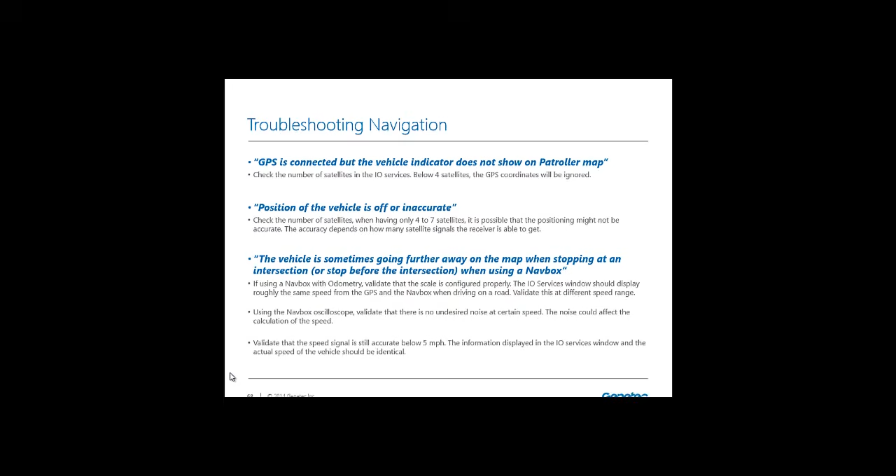Other troubleshooting tips here for navigation. The vehicle is sometimes starting to snap out of the road and go in a circle, usually a very large circle, even if the driver is actually driving straight. This is likely related to the gyroscope of the navbox.

One typical case is your navbox is improperly set up. For the gyroscope to be fully functional, the navbox must be installed in a very flat horizontal position and cannot move while the vehicle is moving. It must be properly installed and bolted to the vehicle to make sure it's always in the same position.

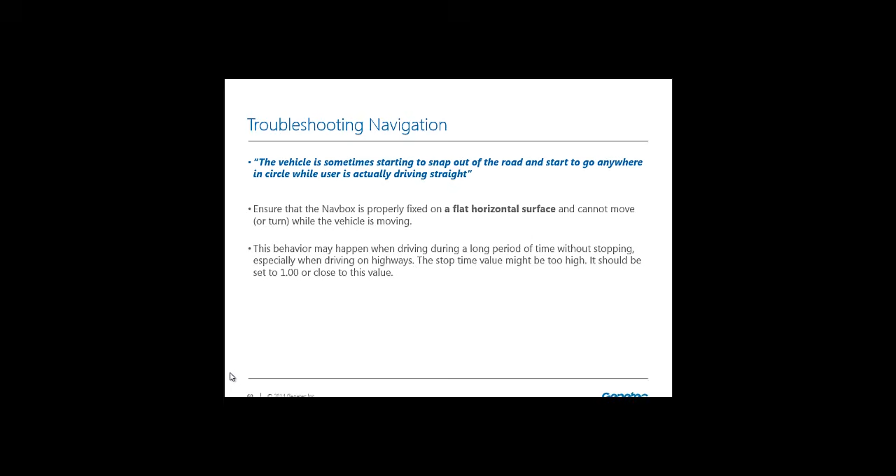This behavior may happen when driving for a long period of time, for instance on the highway. In this case, we'd advise you to review the stop value. There are two settings with the navbox, the scale and the stop value. Look at your stop value and try to lower it - it should be around 1 or something very close to that number. If you have a very big number, you should be concerned.

In a case where a navbox has been deployed before 2014, you might want to validate the firmware the navbox is running. We've done a fix, and you need to check if you run the latest firmware, which is 4.17. If you want more information about this, feel free to get in touch with our support team.

Moving on from navigation options, I'd like to talk about wiring guidelines. Unfortunately, there is a lot to talk about, and we could dedicate this entire webinar to discussing the different aspects of wiring. We feel we need to talk about it here because, according to our support team, it's actually the root of many problems in a mobile installation.

I would preface this section by saying that we're coming up with documentation - a guide called the AutoVu Hardware Installation Guide for SharpX Mobile. It's a pretty extensive guide, very well written, and covers a lot of considerations about wiring guidelines and much more.

Improper wiring in an installation may result in the following: general dysfunction of your AutoVu system, so it's just not working. It might lead to required short-term maintenance because after a while it stopped working. Some very random, unexpected behavior, and some occasional malfunction.

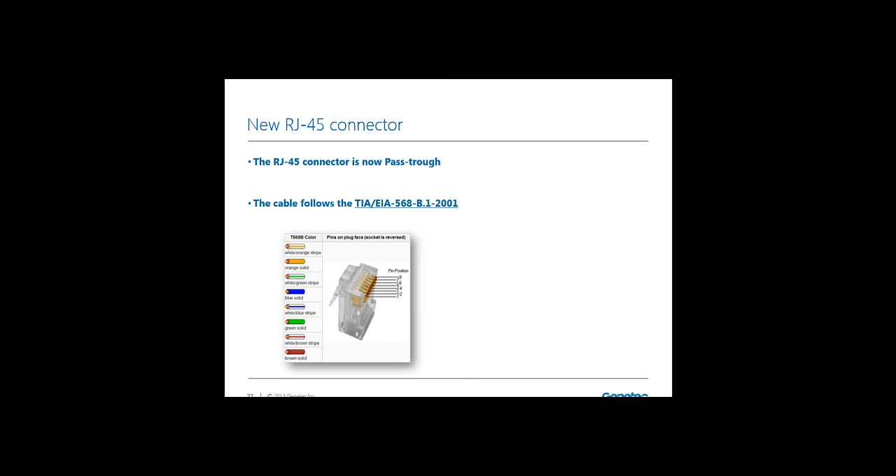One thing we're coming up with is a new RJ45 connector, which is now going to be pass-through. It's going to make your life a lot easier when making the Sharpx cable. By being pass-through, you'll be able to properly position all 8 wires. By the way, we followed this certification here, and this is going to be easier.

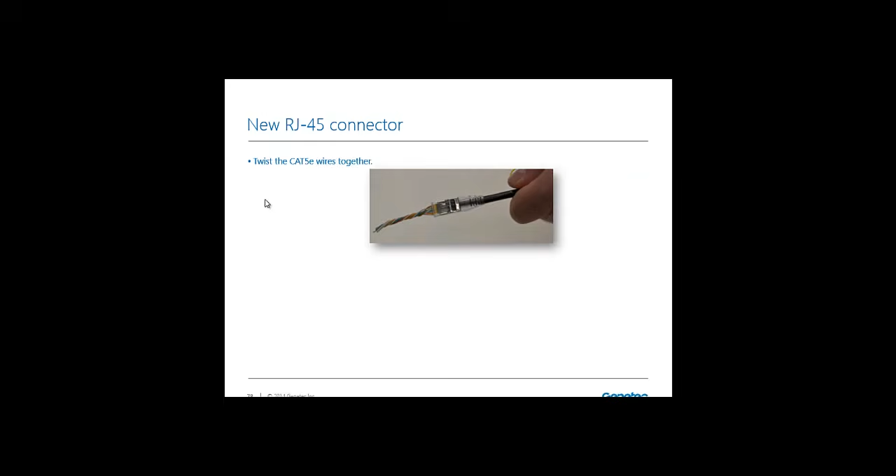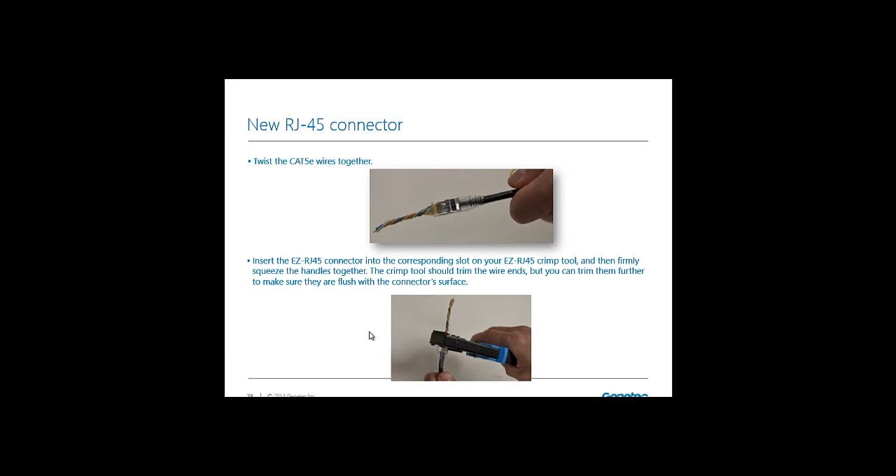Once you pass through the cable, twist the CAT5e wires together, and then using the EZ RJ45 connector into the corresponding slot on your EZ RJ45 crimp tool, firmly squeeze the handles together. The crimp tool should trim the wire ends, but you can trim them further to make sure they are flush with the connector surface. We even have a couple of screen captures here, and this is all in the 'How to Connect and Power Up Your Sharpx' document—have a look at it.

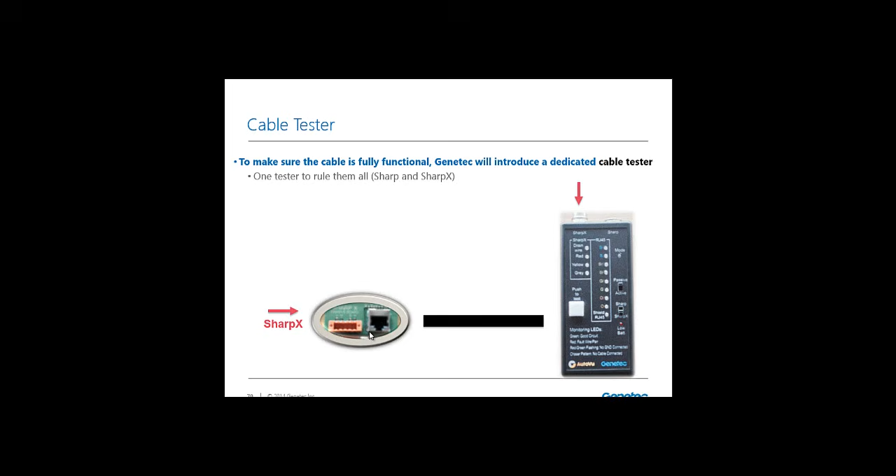You might have heard about it or not, but it's about time we release a cable tester—a Genetec-made cable tester—which will let you make sure your SharpX and Sharp cables are fully functional. This is something you'll need to get your hands on, as it's going to be a very important product for our deployment. Excuse the quality of these pictures, but it's a pre-release, and this is how it looks. This cable tester will let you connect one end of your SharpX to the cable tester itself, the camera end, and the other end will be connected to a termination which looks like this here—I'm just going to highlight it.

Here we have the network connector and the other connector. As you connect the Wiegand cable you just made, you have to put it into Wiegand mode. To test the Wiegand cable, click on push to test, and it's going to show you if it's okay or if one of the wires is not functional.

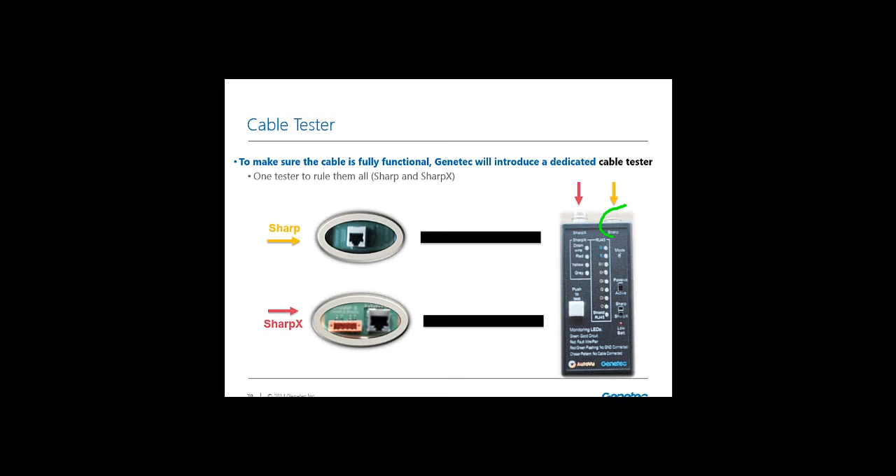With the same cable tester, we're going to give it to you with both the Wiegand termination and the other termination. Here is the connector, and you'll be able to test it as well. Make sure you toggle the switch to Wiegand if this is a Wiegand test. This is a standalone cable tester. It requires a battery but does not need to be plugged in or anything to work. So very small, very easy to carry.

So no excuse to not test your cable before installing it.

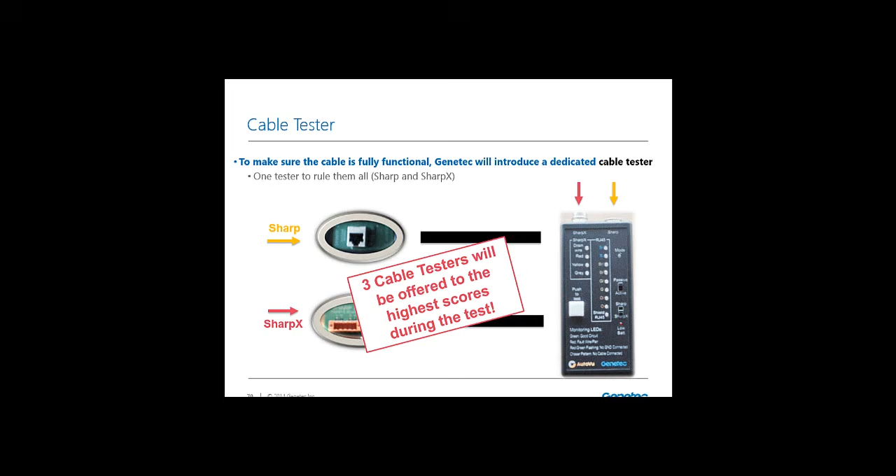Speaking of a new tool, we're coming up with a new benchmarking tool. It's a piece of software which we call the performance analyzer.

Coming from the support department and talking to my fellow colleagues, the field engineers who go on site, doing a performance analysis is often a very time-consuming and tedious process. We've been looking into it and wanted to come up with a software that would do most of the job for you. I say most of the job because you'll still have to do a small part. The performance analyzer is a tool that allows you to quickly evaluate the performance of your system and will allow you to save the result in a standardized format.

There are 2 ways to get data into the performance analyzer. From Security Desk, you generate any read report you want and do an Excel export. You need to include the picture, that's very important. Another way is to do an image capture from the Sharp portal, and you'll be able to use the zip file generated and put it inside the performance analyzer.

To benchmark a system, you require pretty much 3 things: Microsoft Excel, the software itself, the performance analyzer, and at least a read report in XLS or an image capture.